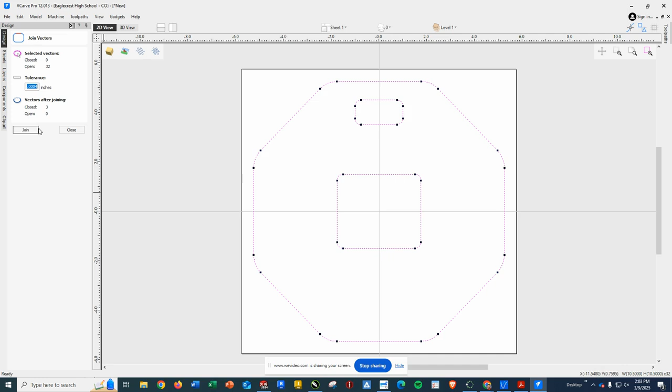When I click that, it tells me that it's selecting 32 open vectors. Think of vectors as lines and curves, line segments. Okay. The tolerance should be fine because, again, we're getting these from somewhere else. And after joining, I would have 3 closed vectors, which would be the outer shape, this inner box, and this pocket here. Now, once I've done that, I can go ahead and click Join. And now when I select this outer profile, the whole profile is selected. And that's exactly what I want before I move on.

Now, VCarve works in this way. So we work with our design. We either create stuff, we adjust stuff. In our case, we import stuff and make sure that things are joined like we need it to be. Then I can click this button over here to switch to the toolpath commands. And now over here on the right, I've got my various toolpath commands.

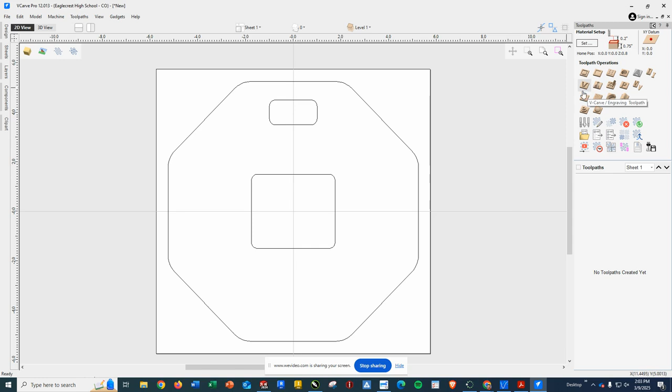Now, I'm going to go ahead and click the outside profile. And at that point, I'm going to go ahead and click the Profile Toolpath, which is the first tool, top left. When I click this, the first thing I have to double check is that my start depth is at 0 and the cut depth is the thickness of my material. In this case, I'm using a 3/4 inch piece of pine.

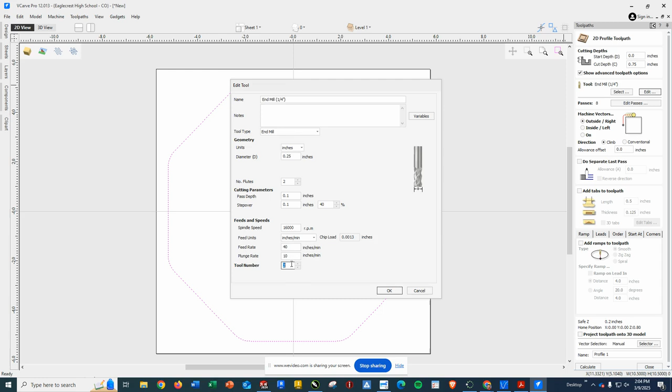Now, I can also select my tool. Now, as I said in my setup videos, you do want to make sure that you can click Edit and look at it and make sure it's in the correct tool number. Now, this is incorrect. The 1/4 inch end mill is in spot number 2. So we're going to make sure we change that and go ahead and click OK. Now, most of the setup stuff is good.

However, if I don't add tabs to the toolpath, when it goes to cut, this center section will now be free. So if I was later going to machine this pocket or machine this cut, the outer piece would be separated from the inner piece. And especially since the outer piece is probably what is secured to the table, this is going to be bouncing around inside. So that's really a problem. So we want to click the button here to say Add Tabs to Toolpath.

You've got some thickness settings here that you can mess with, but these 1/2 inch by 1/8 inch tabs have worked fine for us. So we're going to click Edit Tabs, and this is where we can place our tabs. Now in this case, I'm going to go ahead and put them in the 4 corners. I usually like to use 4 evenly spaced tabs, and the other thing I'll tell you is if you can, put it along a straight edge.

Because when we do that, we can use the bandsaw to cut through the tab, and when it comes off, it's then real easy to take to a sander and sand it so that you don't have the tab still sticking out, to make that tab totally go away. So in this case, I'm going to do it like this because I'm probably going to use a screw or a clamp in one of these corners to hold it down. So my tab is closest to my secured point. Makes a lot of sense.

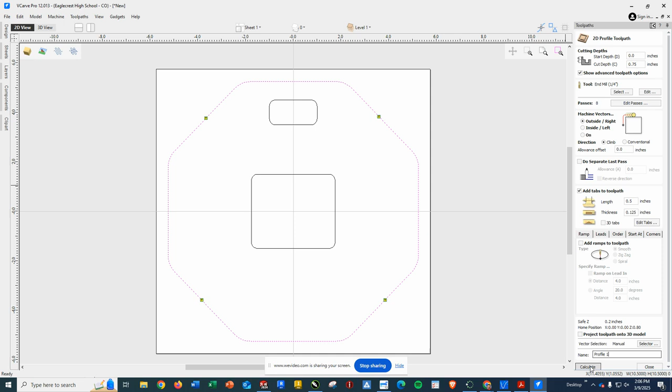Once you've added those little squares, you can go ahead and click Close. As you scroll to the bottom of this, we don't need to add anything else. If you want to name it, you can name it here. So I could do outer profile or something like that. I'm just going to go ahead and leave it as profile 1 because I'm not doing that many different steps for this part. I'm going to click calculate, and it switches to look like wood because that's what my material was already set as.

And then I see kind of blue lines where the tool path would go. So the red line shows where the tool would just move from the 0 point out. And then the blue lines show where it's actually cutting.

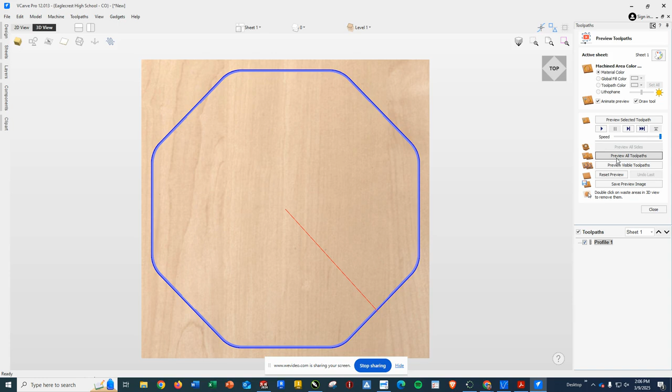Now I can either click preview selected path or just click the play button, or I can preview all tool paths. But when you do that, it just kind of runs real quick, and you can see I've got the little tabs securing my place so that this doesn't move around. Once I've done that, I can go ahead and close that, and that will stay there.

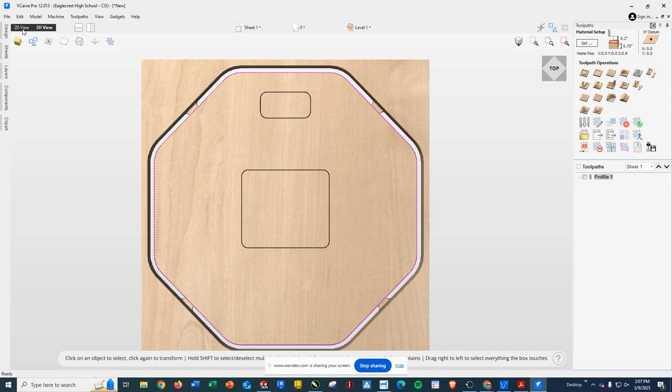Now, if I don't like the look of the actual wood piece, I've got my view part right here. So I can switch back to the 2D view, which some people prefer. Just as a quick side note, this was a pocket, so I'm not going to do anything with that in this video because pockets are in a different video. But I'll go ahead and click the inside profile to switch to that, and now I can do another profile cut.

Now, one of the things to pay attention to, and I probably should have shown it to you on the other one. Again, I'm going to double check my 0.75. I'm going to click edit, make sure it's in the correct tool number. Yep, tool number 2, that's right. And lastly, the machine vectors, okay? Right now, as you can see by this, it is cutting outside or on the right side of this profile. So again, since mine are different things, that's exactly what I wanted here.

We want the cutter, this little beige circle here, in the waste material, not into my part. Okay. Now, if I do this, what I want is I actually want that to be the outer edge of my cut. So I don't want it to cut on the outside. Otherwise, this pocket's going to be way too big. So at this point, I'm going to switch to in. Okay. So as you can see, it's going to cut inside of that.

So again, you always want the tool in the waste material. And in this case, the waste material is to the inside. So that is something you want to check and make sure that you are correct on. Climb cuts are just fine. Again, we'll add tabs. And I'm going to click edit tabs.

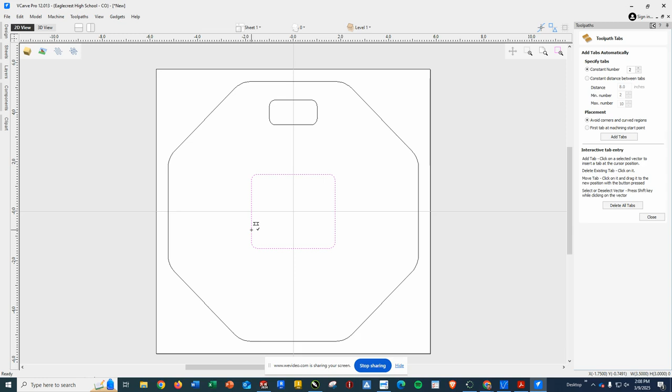And I'm going to go ahead and put these kind of offset because there's no way in here with a bandsaw from the inside, so I'm probably going to have to use a handsaw or something like that. And if I have this be a little taller, I've got more room to get that saw in there and actually have it work. And if this doesn't work right for you, you can always come back and change these tabs. So I'm going to go ahead and click close. I've done everything I need to do.

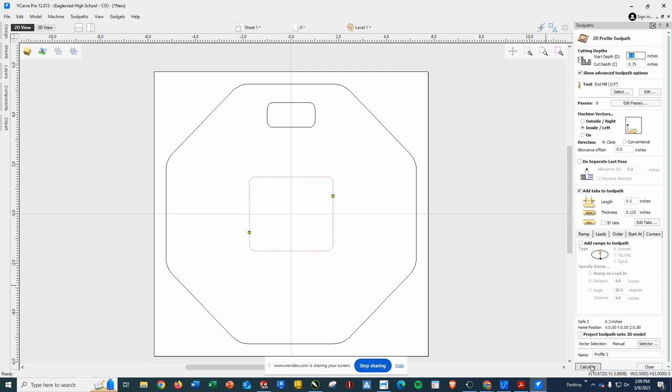Called profile 2. I'm just going to have 2 profiles so I can keep those in order. And I'm going to go ahead and click calculate. So it's going to figure out what it needs to do, and I can preview that selected path, okay? And I'm just making sure that on here, this is not going into my corner. You'll see since it's cutting to the inside, those don't really round, okay? It just goes around on the inside.

I'll be able to put a handsaw into this gap and saw through those and then use a tool or a file or something to sand those down. So that'll work just fine, okay? Just a little side note on this. If you redo a profile, or if you realize, oh, I put that to the outside, you go fix it, you'll still see the old one on here. So sometimes you might need to do reset preview to make this go away, and then you can say preview all toolpaths, and it'll do what it shows right here.

And you saw it went really quick, but it cut the outside first, then the inside last. Okay, and I set it up that way because if you remember, there's a hole drilled in our piece for this particular project, so we put that in the center. And then this is usually screwed down 2 or 3 places, maybe 4. So I would just prefer there to be less stress on these tabs while it's cutting the outside. So that's why I do it that way.

And just to be clear, if you wanted to change the order in which they go, you can highlight a path and you can change the order and move them, okay? For example, if I was to add the pocket back in, I would actually move the pocket to the top because that's actually the part that you should do first.

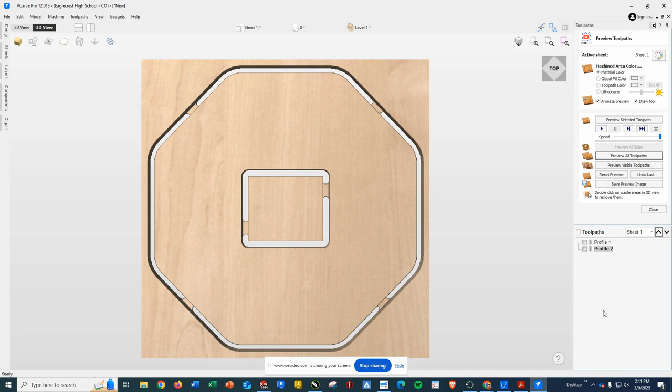All right, with that, you are ready to work on your pockets, or if you need to, there's going to be a different video that shows you what to do once all your tool paths are created and your part is ready to be sent to the machine.